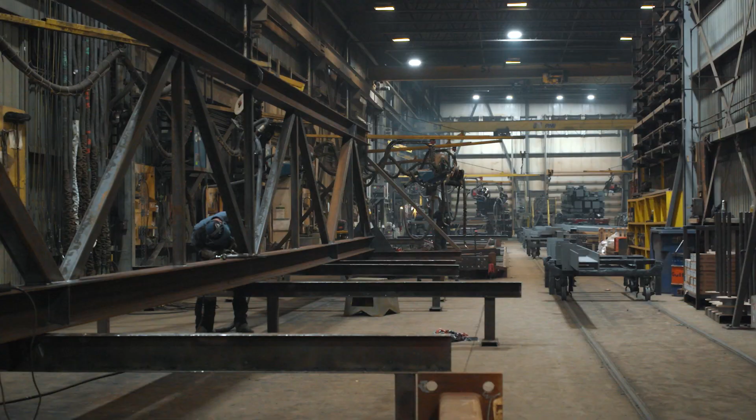PMI Structures was founded in 1951 by my grandfather Raymond, and it was at the time a small machine shop. In 1988, my father Jean took over. Over the years, the company has evolved to become the reference in the design, fabrication, and erection of steel structures adapted to the needs of our customers.

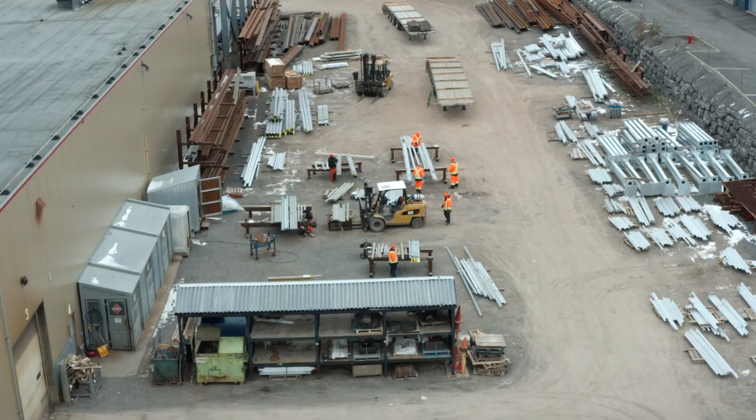Company's growth continued with the acquisition of Prometek in 2016, enabling us to diversify our customer base and meet growing demand in the energy sector. Today, I am deeply proud to rely on the collaboration and the excellent work of over 100 employees spread over 2 production sites.

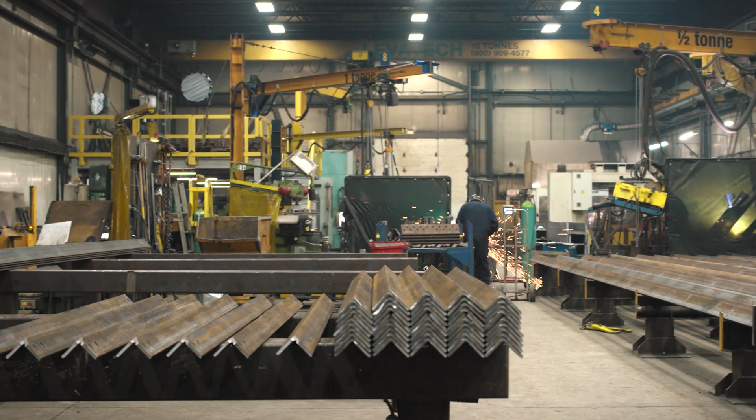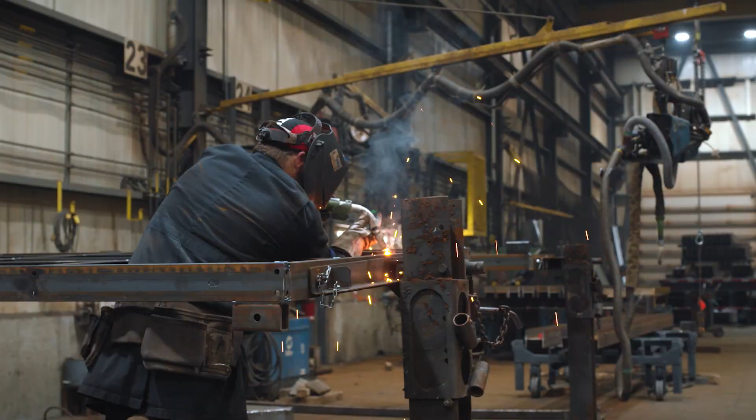The PMI Structures plant specializes in heavy and complex structures, while the Prometek plant specializes in transmission towers and electrical substations. Our plants are equipped with 7 CNC machines, some of them are Ficep. 35 manual workstations complete the workshops for activities such as welding and shipping.

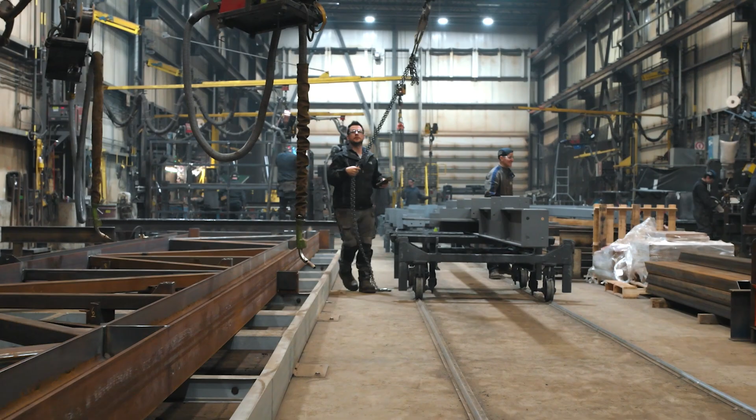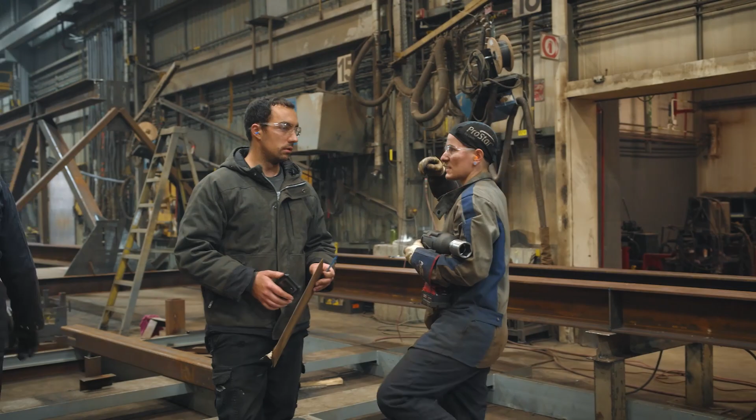The main objectives of the project were to digitize and align our business processes to ensure digital continuity of exchanges with existing systems, to achieve productivity gains and to ensure better monitoring of our operations, to ultimately increase our production capacity. The main challenge of the project was to secure the organizational capacity needed to design and implement the project over a period of almost 2 years.

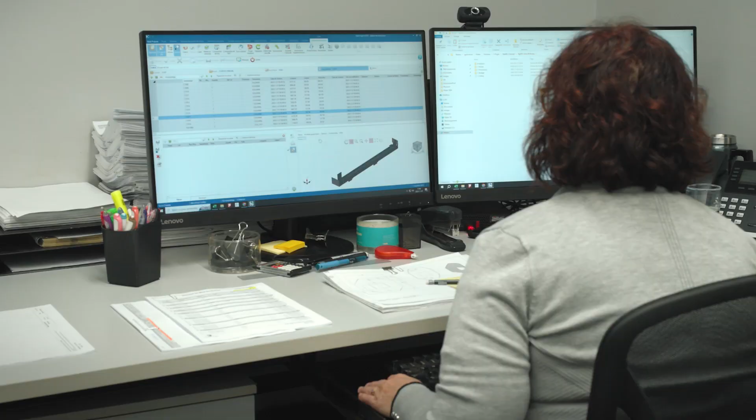Hence the need to choose the best possible partner in this context. We had identified 3 potential solutions and opted for an evaluation process that involved a series of live demonstrations with the same scenarios imposed on the respective sales teams.

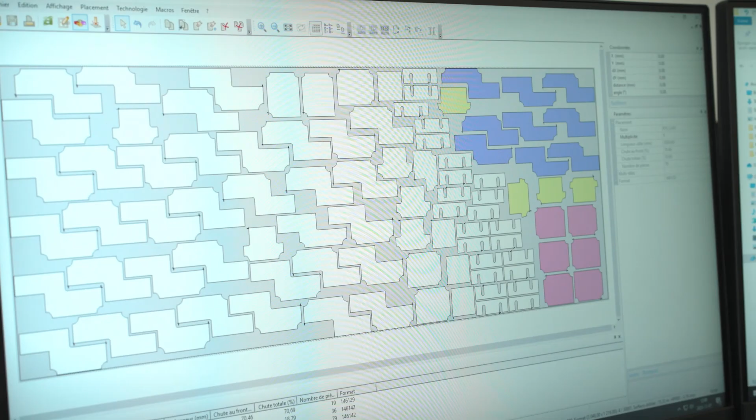We unanimously chose to carry out our project with Steel Projects because of their organizational capacity to develop and support their solution, which Didier, Sylvain, and Cédric demonstrated to us in pre-sales. Indeed, the ability of the chosen service provider to develop our specific requirements was crucial for us.

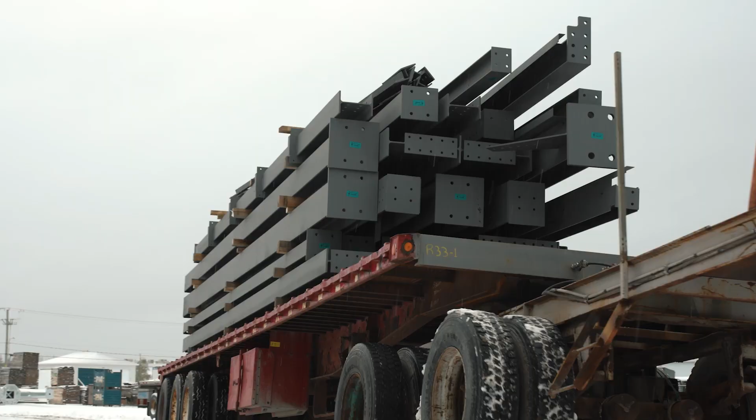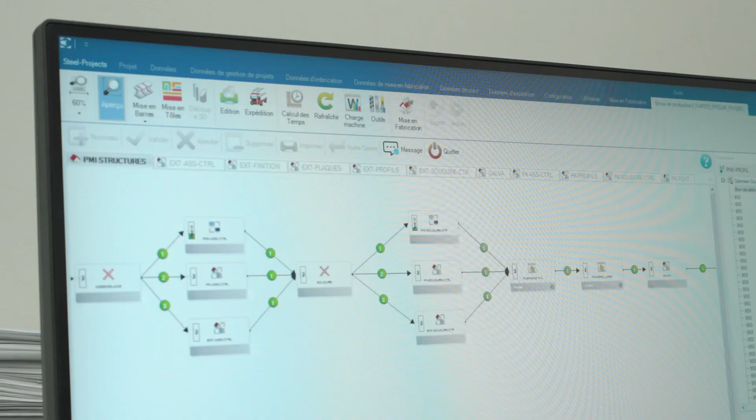We use over 80% of the functionalities available in Steel Projects PLM Solutions, which covers our projects, purchasing, inventory, manufacturing, packaging, and shipping processes. In addition to essential features such as section and plate nesting and CNC machine programming, we also benefit from new features developed especially for our project, such as multi-company mode, which simplifies our inter-factory manufacturing exchanges, or the inspection and non-conformity management on the Android mobile application.

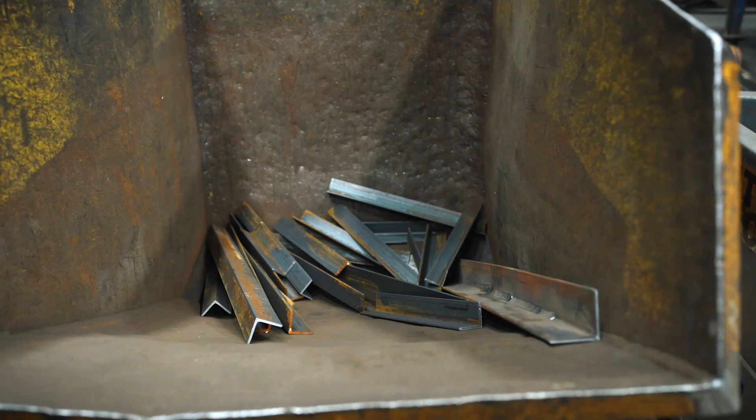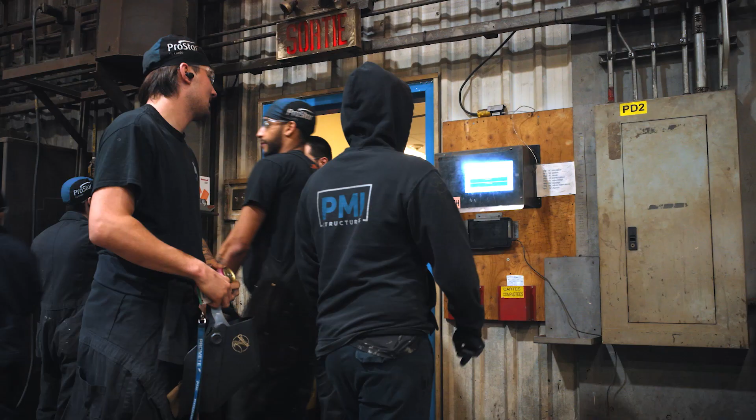First of all, we were able to quickly measure the initial benefits in terms of steel saving and productivity gains. Moreover, we now have a very precise view of what's going on in the workshop, so we can react as quickly as possible when necessary, as well as track the progress and manufacturing times of jobs. For example, we can monitor the times worked by our operators, enabling us to check our performance in real time.

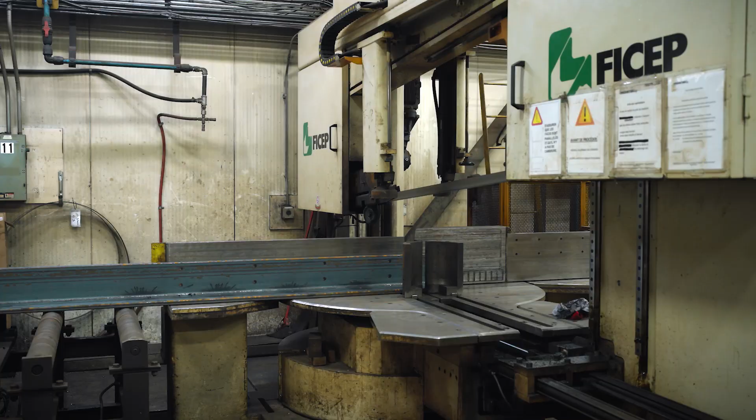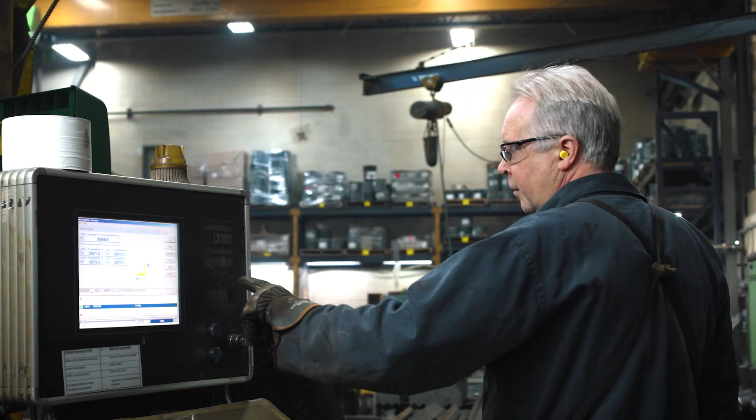I'm one of those people who's always asking for more in terms of functionality from the product committee and the 20 or so Steel Projects developers who respond to customer requests when it's in the interest of the greatest number. This is why the Steel Projects PLM solution offers the prospect of a lasting partnership. My next expectations in terms of functionalities are for global planning and the management of maintenance activities in our facilities.

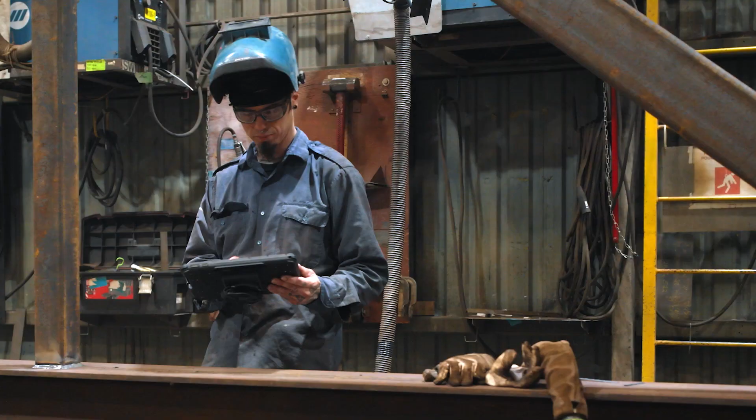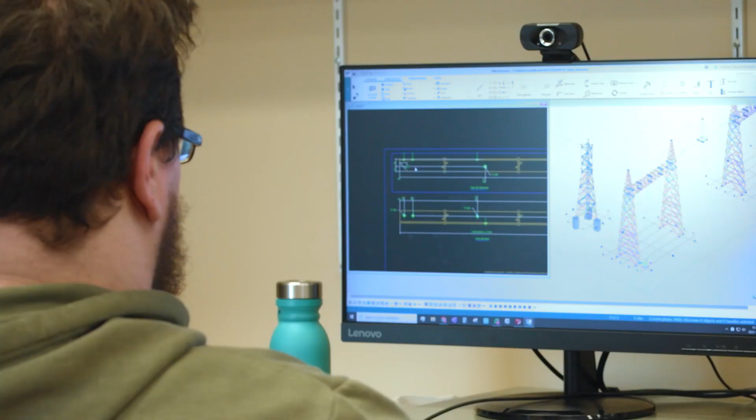Driving change with users is always a challenge, because the first reflex is to want to reproduce the existing system, which is comfortable and well mastered. But when we explain the reasons for the change to users, we manage to get them to use a new tool as it should be used. We then encountered a few difficulties with the alternation of units of measurement between the metric and imperial system, but the team rose to the challenge.

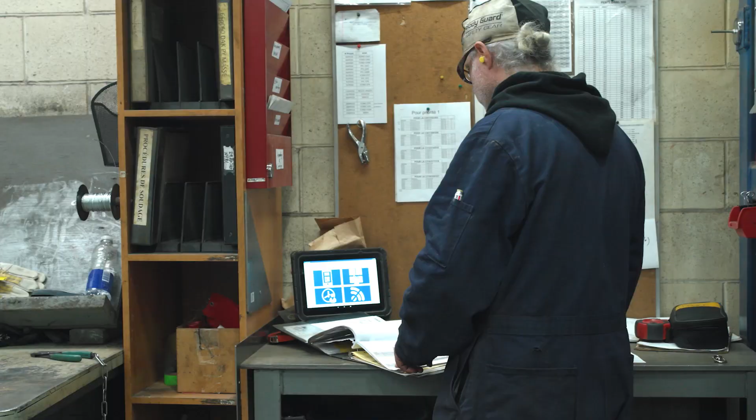What I personally retained from the project is the dynamic collaboration with Sylvain, Boone, Cédric, Federico, Simon, Pamela, and Didier, who were more visible, as well as with the entire Steel Projects team behind them, who rallied to enhance the user experience throughout the project. Despite the difficulties we encountered, we always felt a real focus on customer satisfaction, and that makes all the difference.

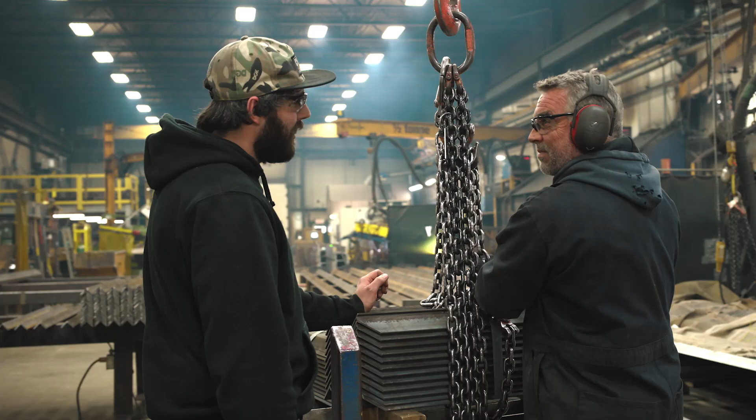Yes, without a doubt, the positive go-live experience is the result of a concerted preparatory effort. Many thanks to Steel Projects for their efficient intervention in our organization. You are a supplier of choice. We work with highly skilled collaborators, and together we form an incredibly efficient project team.